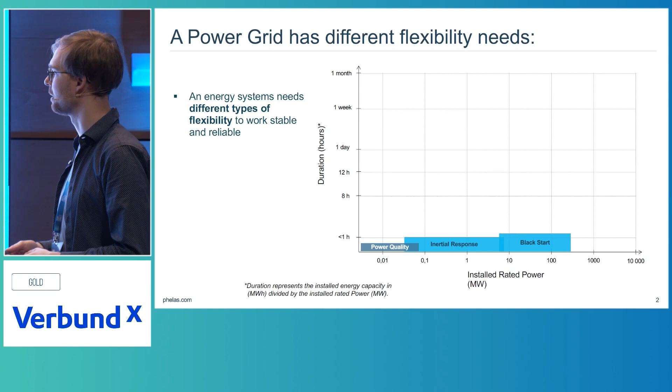Well, let's start with that. It's an energy tech summit, so I don't have to go through that. It's the all-known Ragone plot. Everyone does it a little bit differently to frame their own narrative. I want to look at what kind of needs a power system has. We have here the power, and on the y-axis the energy. And we see that, of course, we have all the ancillary services and so on in the lower duration. And we are getting into the shaving of peak loads and eventually the strategic generation backup area. And for us, it's quite clear that there are different areas.

We have here the short-term area. We have here what we call long duration, and then what we sometimes call ultra-long duration or seasonal, in the upper right corner, just to separate out these different applications, because especially in Germany, I feel like these things are mixed together, torn around, and not properly separated in discussions. So I want to do that here as a service. And that also means that different technologies, always a function of the economics, are in here. You have to separate that out.

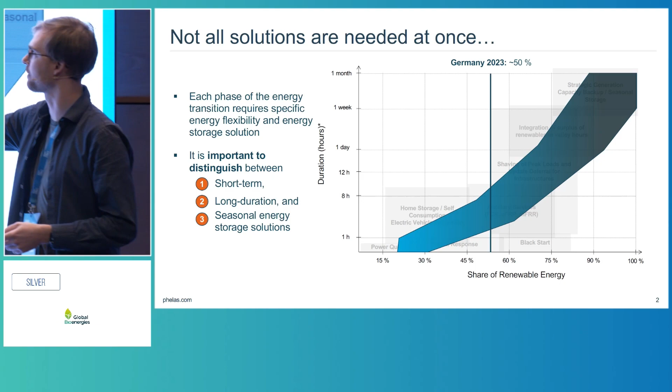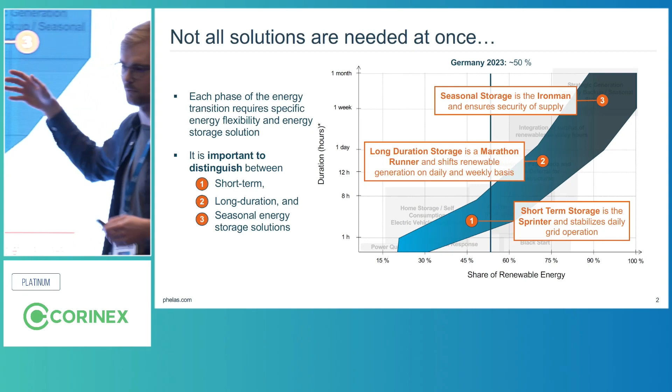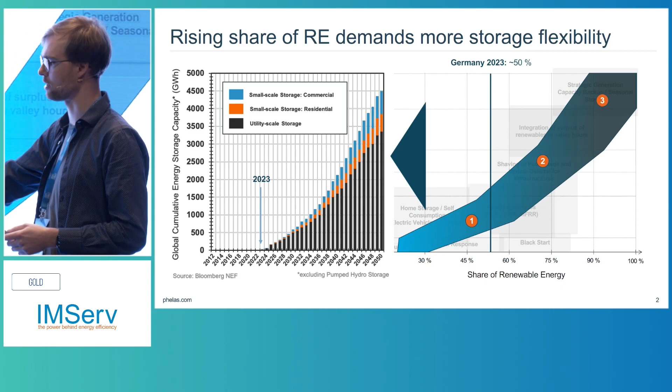And we see that, especially with the share of renewables, with Germany now at roughly 50%, we are shifting from short duration as a sprinter to more long-duration applications. And of course, the end game will be what we call the Ironman, the seasonal application. But right now we are tackling that. Everyone agrees we need a lot of energy storage, and we are really at the beginning of this change. But if there's such a big consensus on that, why are we not unlocking the full potential? What is holding us back?

As a business developer and analyst, I look at that from two different sides. On the one hand, you look at the endogenous parameters, like what we heard before: the different technologies, the cycle life, all the things which come out of the technology. On the other hand, we see incentive structures, regulation, climate, whether we have a cap and floor, now discussed in the UK, the capacity market coming in Germany, all these other things. Only if they come together do we find that business case. We need new technologies pushing this boundary, and we need new incentive structures.

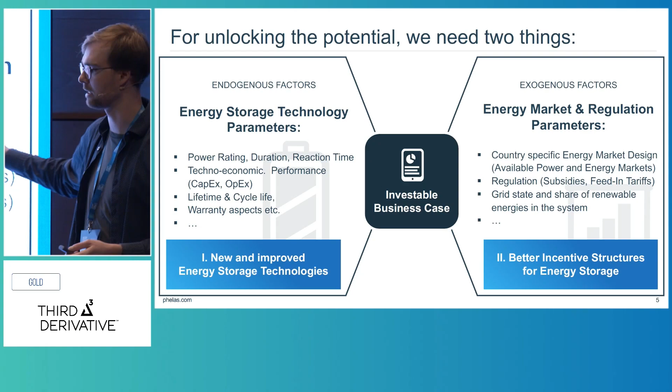But I'm here today telling you that there's a third one, and it's actually how we capture the value of flexibility. I see that as a big problem right now in the industry, because we're coming from the project finance perspective of wind and solar, and we're trying to use the same concept in energy storage. I think that is not perfect; it's not wrong, but it's not right either. And I'm saying the project approach to energy storage is flawed.

Let me explain why. We have a standard system. Well, I'm an engineer, that's why I like this kind of graphs. We have storage, we have wind or solar, we have a grid connection, we have all these different markets. Here now for Germany with FCR, aFRR, day-ahead, intraday.

And the first problem is, I see a lot of projects being kind of independently sized and designed. Like, you look at storage independently from the solar asset. You say you do co-located, but actually what you're doing is you just share the grid connection with the renewable energy asset. You're not planning them integratedly.

The other thing is, we don't have a good understanding of congestion and curtailment. And I see that a lot of projects are being planned without that major component being taken into account. And the other thing is merchant. We are mainly looking into merchant solutions, while the whole PPA topic is now gaining traction, but not for co-located. It's even down the road. So I see these as challenges.

And the last one is you have to look into a portfolio perspective, because it's nice that you take decisions on single project level, but you want to also minimize correlating portfolio risks in your decision. So you need to have a better understanding what technologies you want to use to actually mitigate that risk. And that is already the point. I say, look at the insurance effect of energy storage.

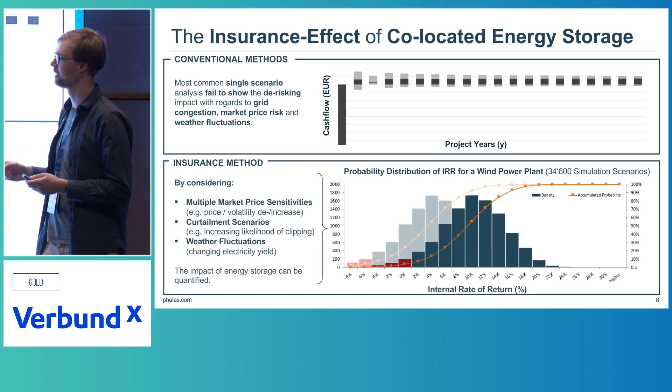We mainly analyze, that's kind of a typical analysis we do, what are the cash flows 20 years in the future, these markets, what's the IRR? Great. But it misses exactly all these points. And what we are proposing is a more sophisticated method, which is scary because it's more sophisticated, but is also helping us to capture these problems better.

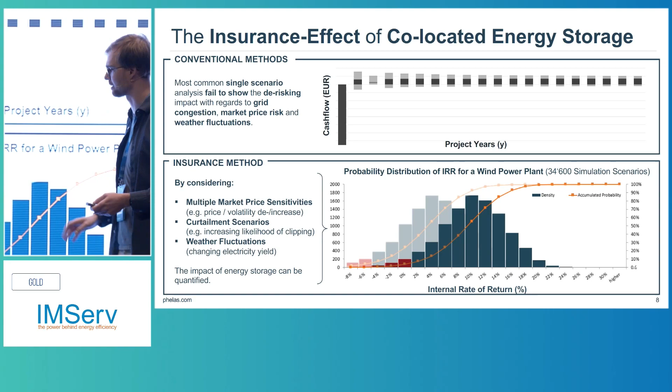By looking into different market prices, which we cannot predict, we can actually predict certain curtailment scenarios. It's not impossible. You can make scenarios up for that. No number is worse than a bad number in that case. And you can look into weather fluctuations, all that. You have models, you have all these kinds of things. And by that, looking into what we call a probability distribution.

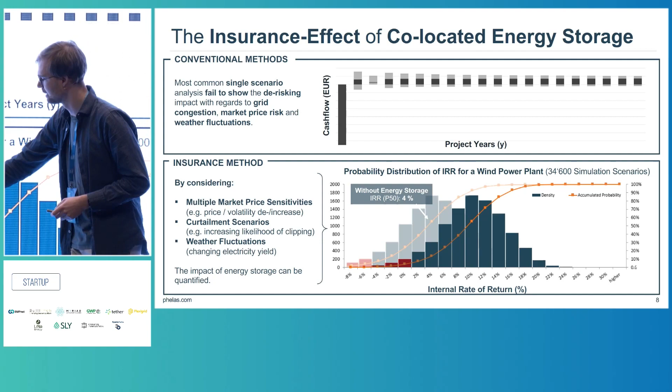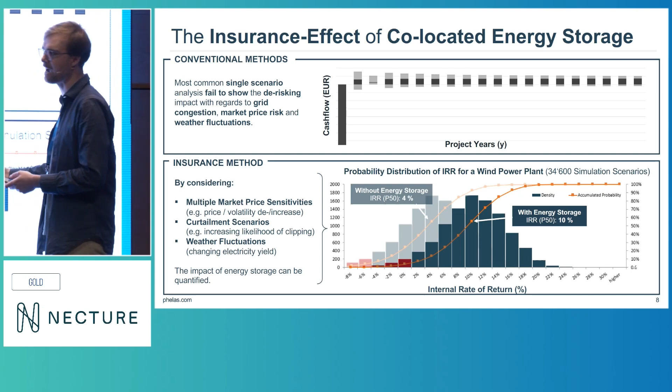And what we see is that without storage, especially from a renewable energy asset, the IRR distribution is actually more risk prone than when you are introducing energy storage. And we have this perfect method, P90, P50, you know that from wind and solar. But we're not using it for storage because the methods are not there, it's too complicated, etc. But that would be a starting point to get exactly to the insurance effect.

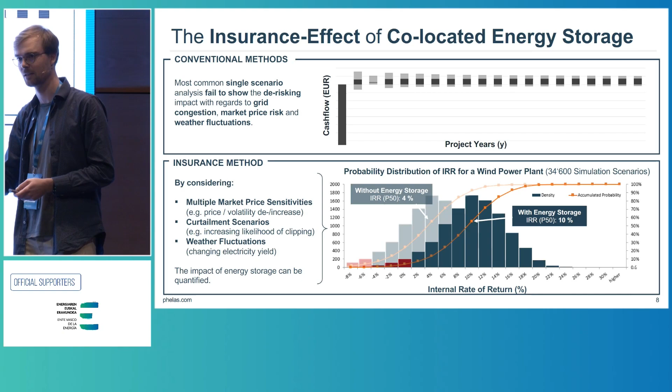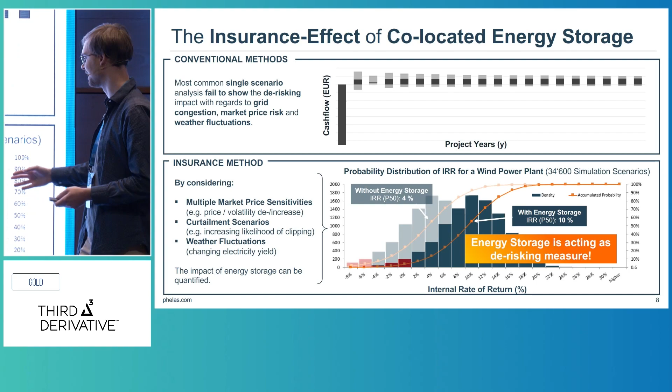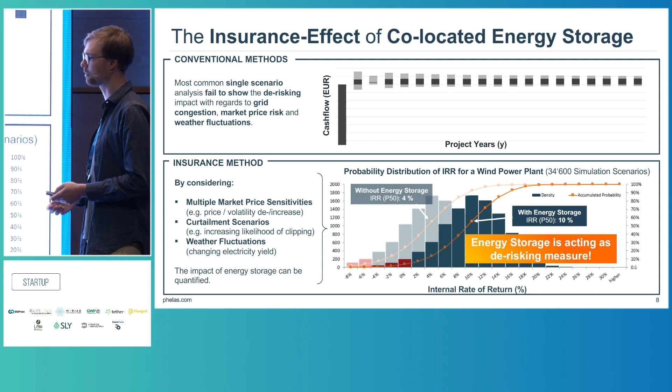And I'm telling you that a storage system can provide value beyond the revenue streams. It can actually help you to de-risk your co-located or your wind profile. And that's already my summary for today. It's a 10-minute talk, so I had to make it really short. But energy storage is acting as a de-risking measure. And we have to start finding methods to convey that to investors, to convey that exactly to the developers, to understand how they can actually transfer that message.

And the first thing, I was like, what's the business case of an emergency generator? You don't have a business case. It's exactly that. We have to rethink that also for storage, that it helps us to navigate through rough times, which we might not have on our radar.

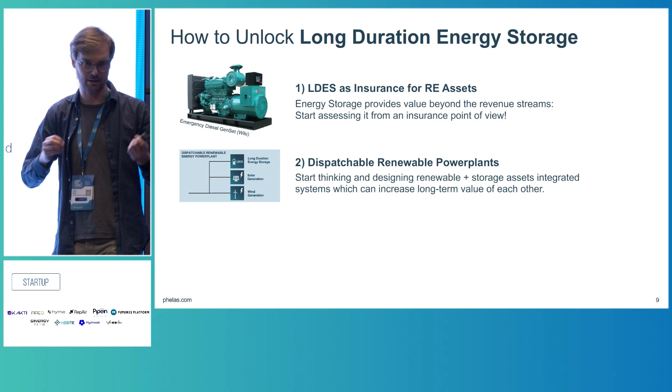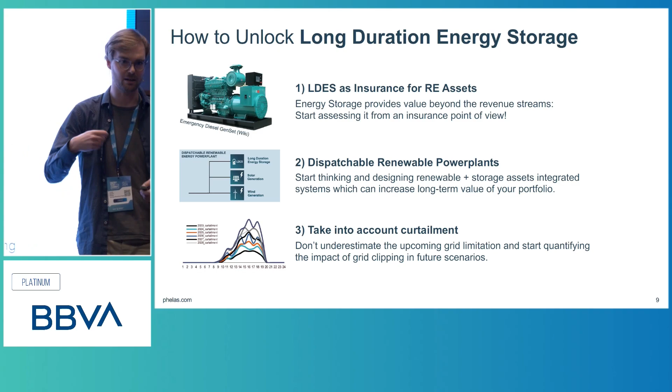The second one is think of dispatchable renewable power plants as a whole, not only as integrated systems optimizing for each other. And also, last but not least, take into account curtailment. It's not that difficult. We can come up with simple numbers just to start understanding what would be the economic impact. Well, last slide.